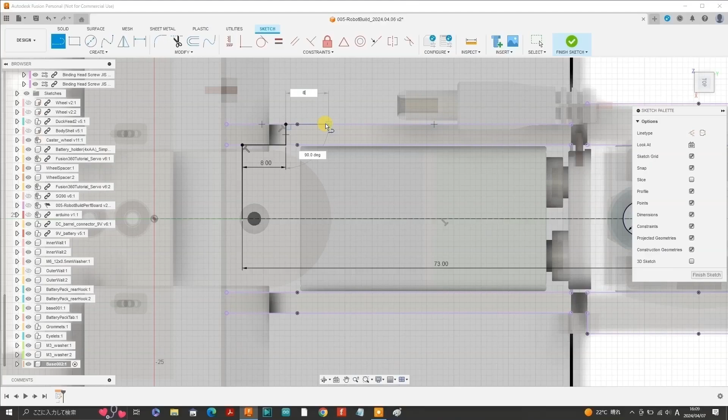In part 11, we made steady progress on the chassis design using Fusion 360. Today in part 12, among other components, we'll design a rotatable catch for defining the insertion stop position of the 9-volt battery. Let's start with a section analysis to check a few things.

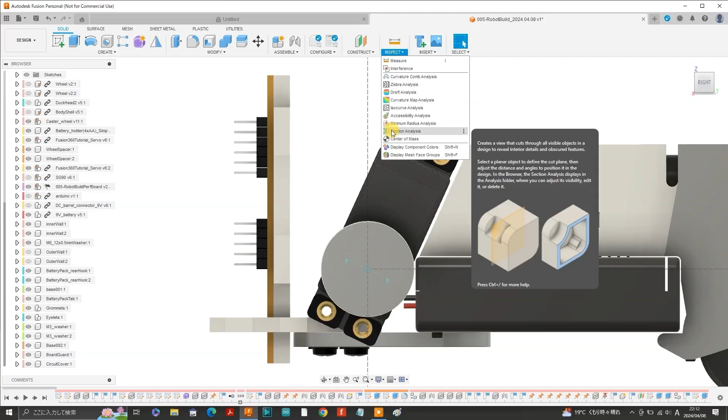Select section analysis from the inspect menu, swivel the design so that we can see the vertical lengthwise plane, and select that plane. We can see the two screws nicely screwed into base 1 via the battery tab, and the wiring on the rear side of the circuit board safely protected by the board guard and the circuit cover.

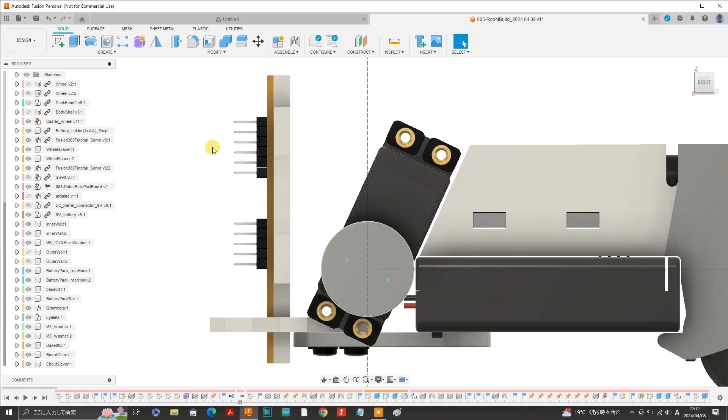Press OK to finish the section analysis and unhide each outer wall. Activate outer wall 1, select the outer face and select sketch. Press P to project and project the shape of the board guard protrusion onto the face of the outer wall, and also the corresponding protrusion of the 0.5mm thick circuit cover, and also project the lower protrusion in the same manner.

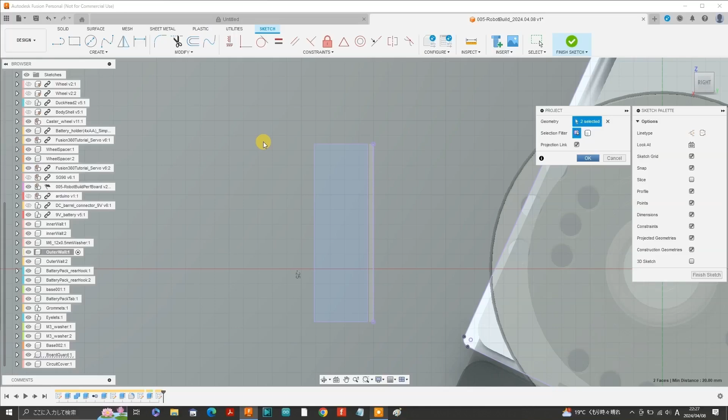Because the board guard and the circuit cover are separate components, I thought it would be best to sketch a rectangle to encompass both projected shapes of the protrusions of these components while utilizing the projected shapes for snap points. Next, use the offset tool, select the rectangle we just sketched and set an offset of -0.2mm.

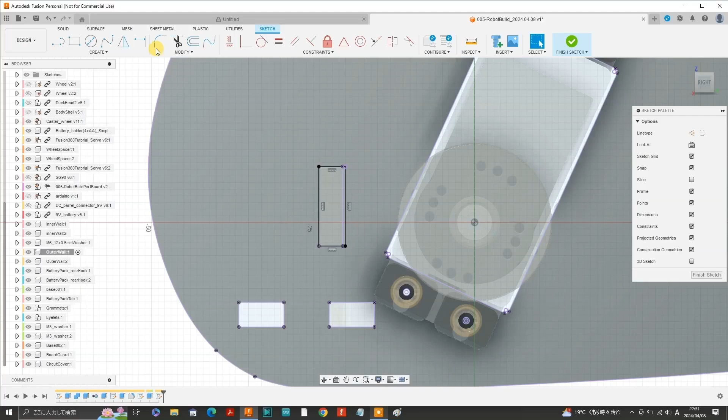Create a similar offset for the lower rectangle too. Now we want to extrude those rectangular shapes. Let's first hide the circuit cover and the board guard.

Now select the entire area within the rectangular shape and extrude by -3.7mm. Do the same for the lower rectangular shape.

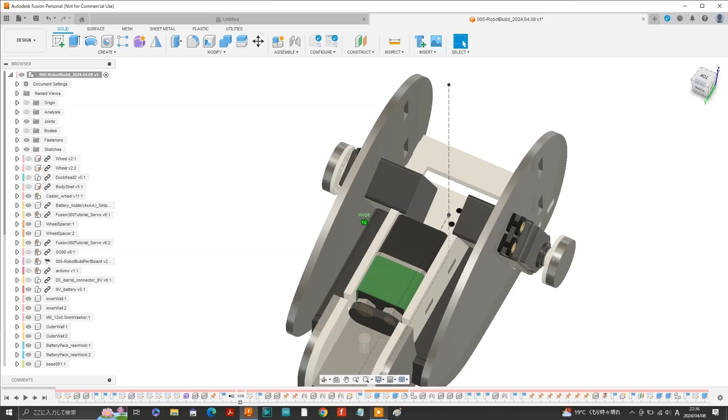Activate the main design, and as you can see, upon turning the design around to the other side, corresponding rectangular holes have been automatically formed on the other outer wall. Now we can unhide the circuit cover, the board guard, and the circuit board itself.

Next, we want to screw the circuit board to the board guard and circuit cover, so let's measure the thickness from the front face of the circuit board to the rear face of the circuit cover to determine the length of screw that we'll need, and it reads 5.8mm.

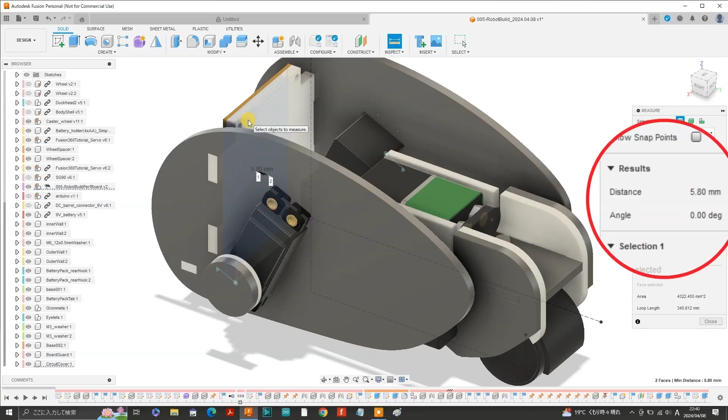Select metric M3, and I think a length of 8mm should be fine. Scroll down to the nylon screw, select the step format and download.

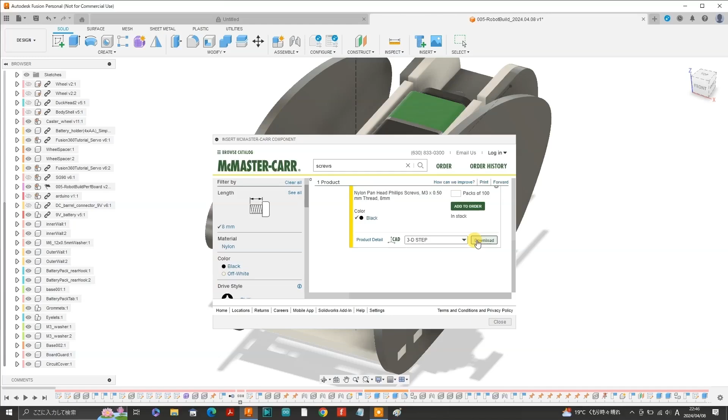Move the screw to the front, color it white, modify the component name for better readability, and make 3 copies of the screw so that we have 4 nylon screws.

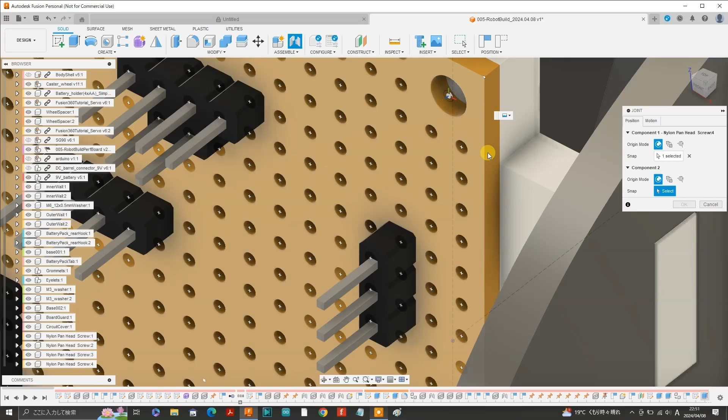Use the joint tool and select the underside of the screw head while pressing the control key. Select the center snap point and swivel the design back and select the center snap point of one of the mount holes. There we can see the nylon screw gliding into the mount hole.

Insert the remaining 3 nylon screws into the respective mount holes in the circuit board in the same manner. I labeled each joint screw to perf board.

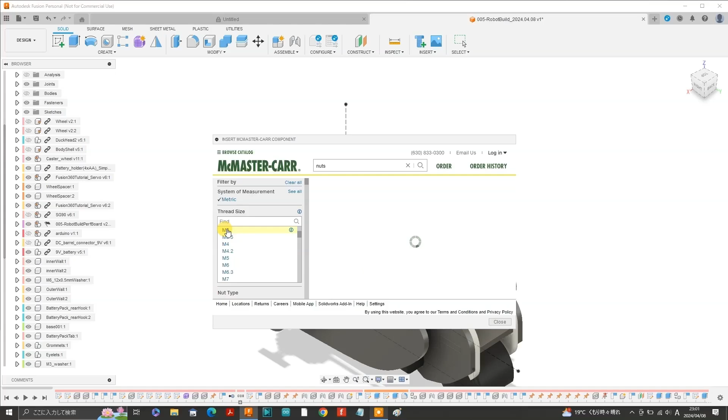Select an M3 nylon nut and download the step file. Move the nut to the front. I renamed the nut M3 nylon hex nut. Color the nut white, make 3 extra copies of the nut, and join each nut onto each corresponding screw end. I labeled each joint nut to circuit cover.

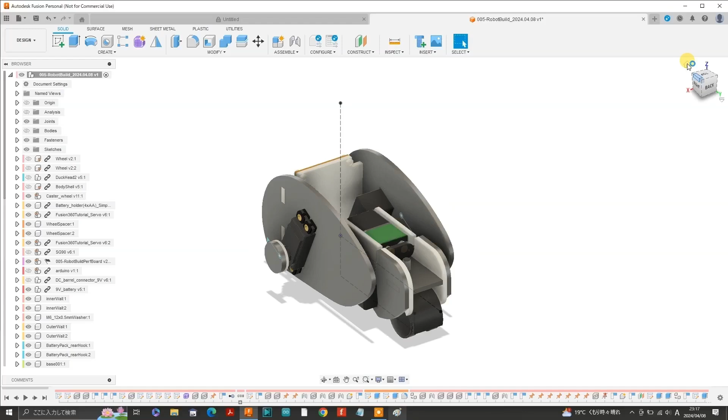Next, unhide outer wall 1 and also inner wall 1 and battery pack rear hook 1. At the moment we have an M6 washer through which the bolt of the caster wheel fits and onto which base 2 sits. So let's make a copy of that M6 washer and move it up a bit.

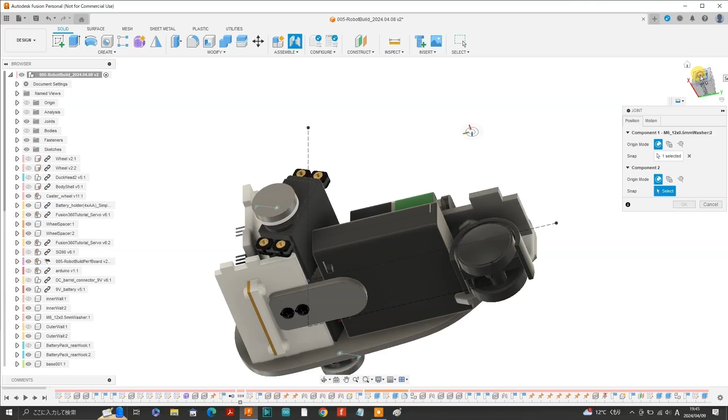From assemble, select joint, select the center snap point on the underside of the washer, then select the center snap point on the top of base 2 at the hole, and the washer glides into place. Label the joint M6 washer to base 2.

Now it's time to add an M6 nut. In my case, I already have an M6 nut design in my data panel. You can easily download an M6 nut from, for example, Insert McMaster Carr. So I'll insert the M6 nut into the design.

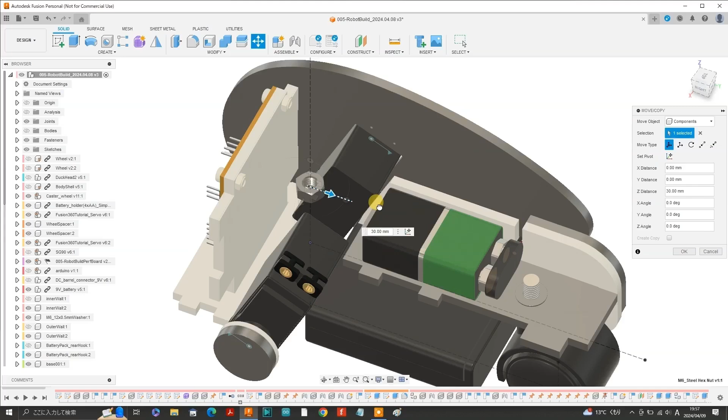Now use joint to assemble the nut onto the caster wheel bolt so that the nut sits onto the M6 washer. Before we carry on, we should label the new joint, M6 nut to M6 washer.

Next, we'll adjust the longitudinal position of the 9-volt battery using the move tool and move the battery back by 2.5 millimeters, which seems a good position relative to the M6 nut.

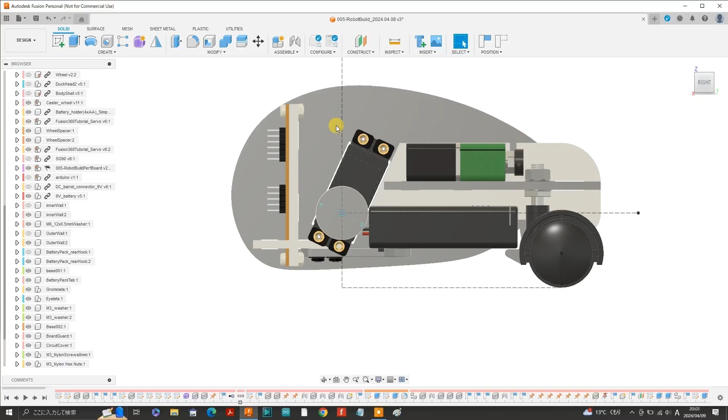Unhide inner wall 1, turn the design around to the other side and hide outer wall 2. Since we adjusted the longitudinal position of the 9-volt battery, the notch in the inner wall no longer aligns with the wires from the 9-volt battery snap connector, so we'll need to make a few adjustments.

Hide battery pack rear hook 2.

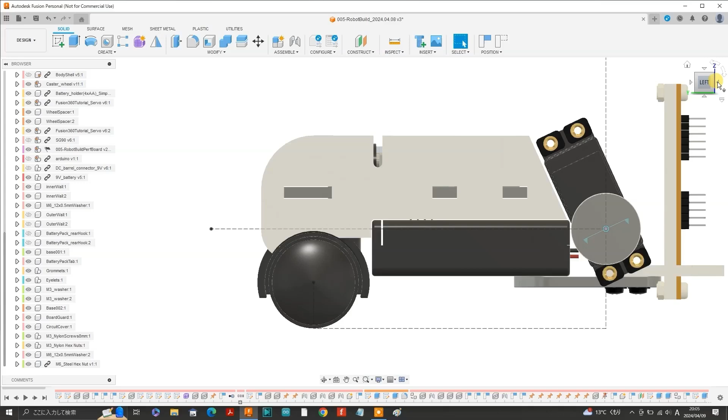The sketch for the notch in each inner wall is on inner wall 1, so let's rotate back to the left side. I eventually found the sketch that includes the notch in the main sketch folder, which means I mistakenly forgot to activate the inner wall when creating the sketch.

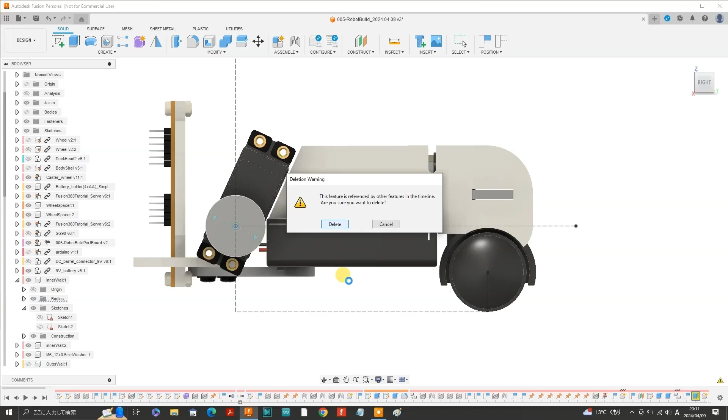So I'll just delete this sketch because it was dedicated to form only the notch. We should also delete the extrusion of the notch from the timeline. Now turn the design around and activate inner wall 2.

Select the outer face of the inner wall and create a new sketch. Select capture position, zoom in a bit, and press P to project. Then just select the face of the inner wall and hit OK.

So we'll first sketch an initial 18mm line from this projected point, then an initial 7mm vertical line, and change that 7mm line to a construction line.

Select circle, sketch a 3mm diameter circle, and we need to convert that circle to a solid circle rather than a construction circle. Draw a solid vertical line parallel to the vertical construction line at an arbitrary position but slightly longer. Select the tangent tool and make that line tangent to the circle.

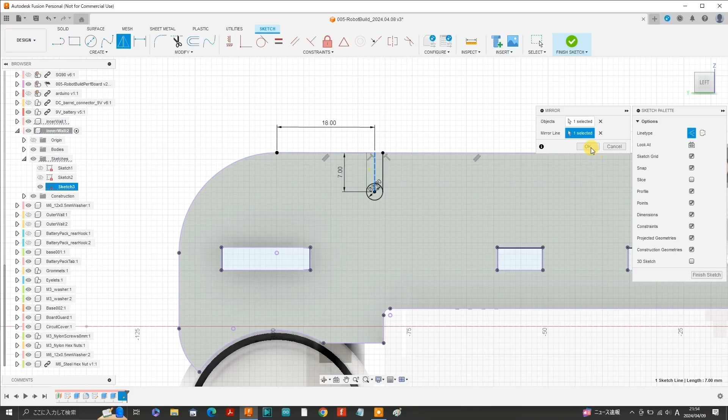Then make the endpoint of the line coincident with the tangent point using the coincident tool. Then simply mirror that line about the construction line using the mirror tool. Finish sketch and cut the notch by 3.7mm using the extrude tool.

So initially it doesn't look as though the notch is in the right position. I'll just activate the main design to have a decent look. So it looks as though the notch needs to move forward a little and also a little longer to accommodate the wires coming from the 9-volt snap connector.

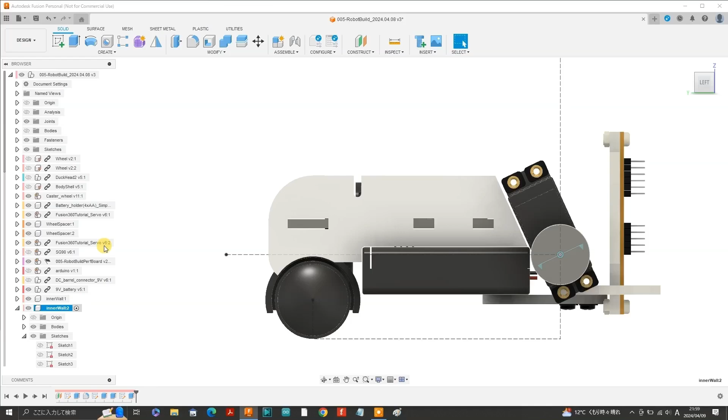Activate inner wall 2, edit the latest sketch, sketch 3, which actually activates inner wall 1 as inner wall 2 is a copy. Change the position of the notch from 18 to 19.5 millimeters and the vertical dimension from 7 millimeters to 10 millimeters. Finish sketch and also hide the sketch.

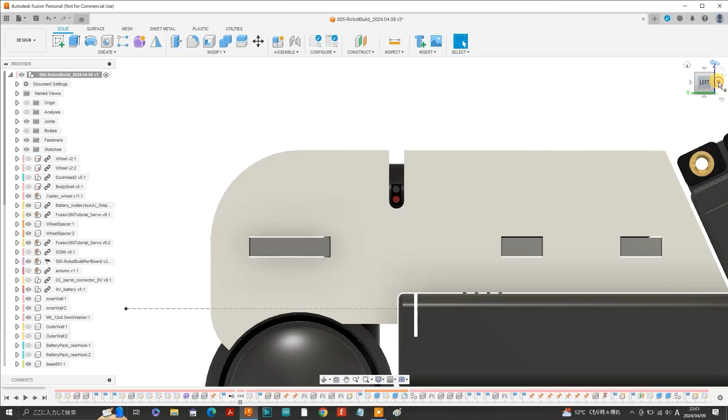Activate the main design again. There we can see that the wires from the snap connector can extend through the notch unhindered by the inner wall. However, once we unhide each battery pack rear hook, since we have deleted the old sketch of the notch,

which each battery pack rear hook relied on for part of their profile, it becomes apparent that we need to redo the front part of their design. So let's edit sketch 1 of the battery pack rear hook, which has become unconstrained.

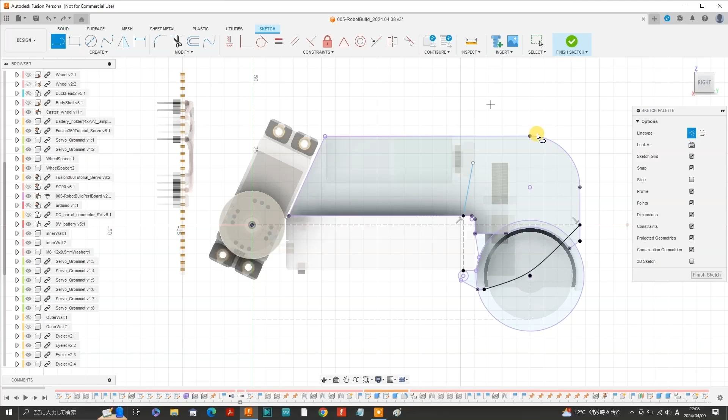Sketch out the dimension of 19.5 millimeters. Sketch a vertical line from that point to a length of 17 millimeters, and right-click on that angled unconstrained line and delete. Now from Create, select Conic Curve.

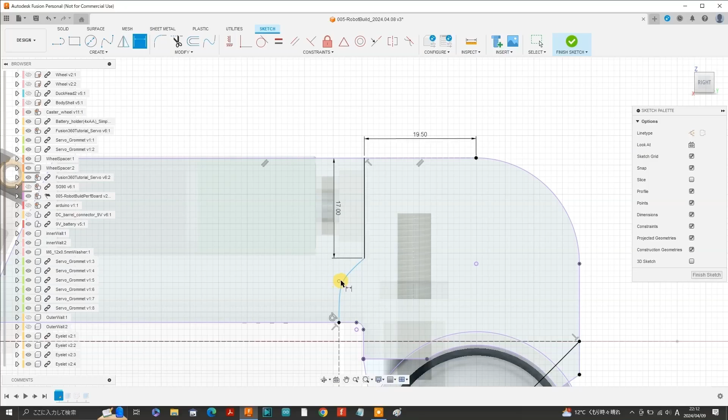Select a conic curve from the bottom of the 17 millimeter vertical line to the point where the deleted line commenced, and set the distance of the vertex point to 7.5 millimeters. Finish sketch, and use the extrude tool to cut the unwanted section.

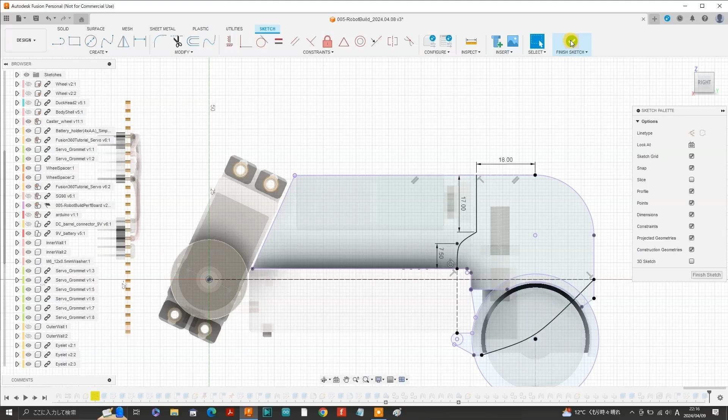There we can see we have used the wrong size dimension for the upper dimension, so let's fix that. Edit sketch 1 of battery pack rear hook and change the 20.5 millimeter dimension to 18 millimeters. Finish sketch. Now we can hide that sketch and we can visually confirm that the battery pack rear hooks no longer interfere with each respective notch.

While we're here, we can round the corners by 2 millimeters using the fillet tool, and likewise at each corner at the open end of each notch.

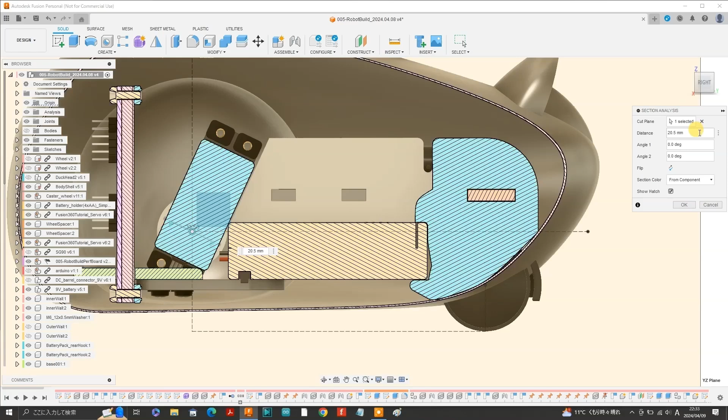Let's do a section analysis at 20.5 millimeters from the longitudinal plane to check whether the battery pack rear hook interferes with the body shell. And when we zoom in, we can see that the battery pack rear hook does interfere a little bit with the lower body shell.

Hide the body shell and edit the sketch of battery pack rear hook 1. I won't go into detail, but I'll just modify the lower profile to bring it safely away from the body shell and then finish sketch.

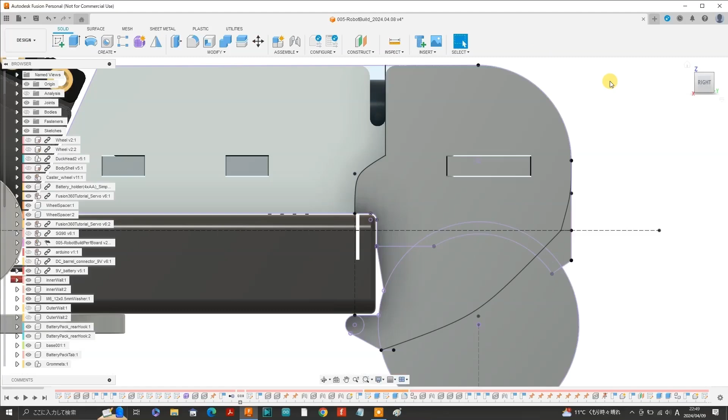So the profile of the battery pack rear hook has been redefined, so we'll use the extrude tool to cut off the excess material along our newly sketched line. Hide the sketch, do another section analysis, and we can see that the battery pack rear hook is clear from the body shell.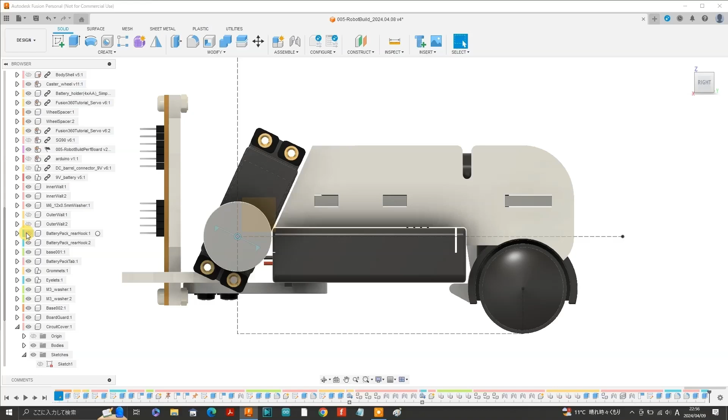Now we need to start thinking about joining the two inner walls together, so first hide battery pack rear hook 1 and activate inner wall 1. Select the outer face of the inner wall and create a sketch.

Press P to project and select the entire face to project the entire profile. Change the line type to construction. Sketch a 10mm vertical construction line from the rear top corner of the rectangular opening.

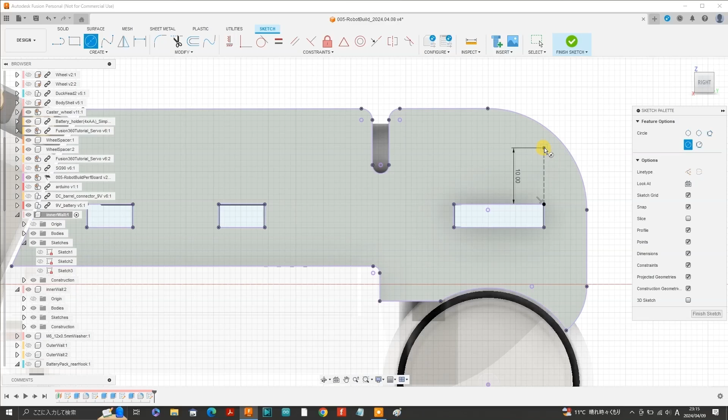Then sketch a 20mm diameter circle centered on the endpoint of that construction line and a small inner circle having a diameter of 3mm. Extrude the protruding circular section by 3.7mm and hit OK. Cut the 3mm hole by extruding by 3.7mm.

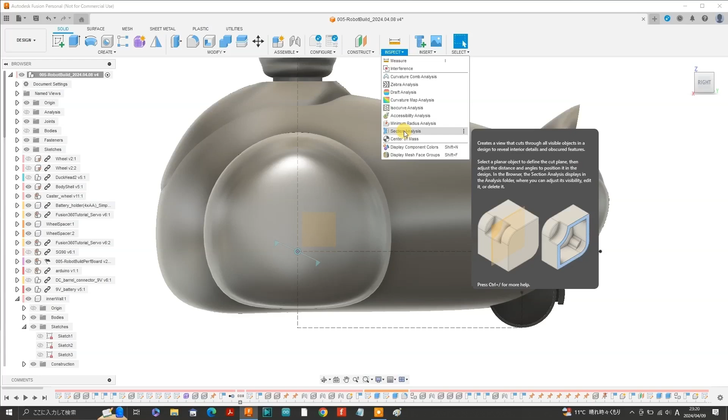Hide the sketch and activate the main design again. Unhide the body shell and do a section analysis at 16.8mm from the center, and we can see that the circular portion of the inner wall is not even close to the body shell.

Actually, we might edit the sketch and adjust the dimension of the circle from 20mm to 12mm and finish sketch again.

Hide the sketch and we can see that both inner walls have automatically adjusted to the new size of the circular shape. Unhide battery pack rear hook 1 and activate it.

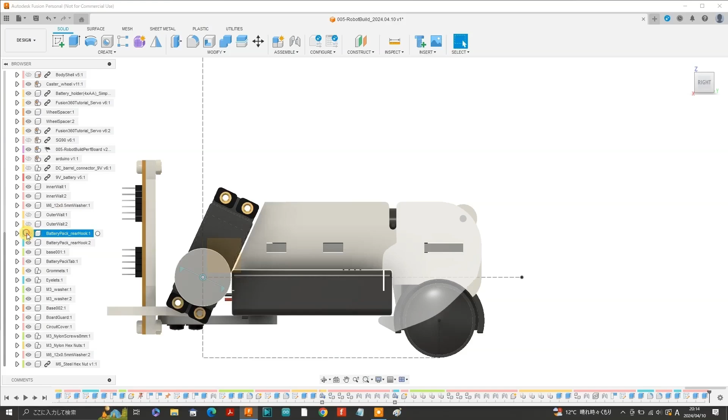Create a new sketch and select the outer face as a sketch plane. Press P to project, select the inner wall including the newly created circular shape, and hit OK. Then extrude the circular shape.

Extrude by -3.7mm, unhide the sketch, and form the hole by extruding by -3.7mm. Hide the sketch and activate the main design again.

Hide inner wall 1, switch to the top view, hide inner wall 2, and hide the 9V battery. Next, edit the sketch of base 2 and use the line tool to sketch a line across the base at the 8mm mark, then finish sketch.

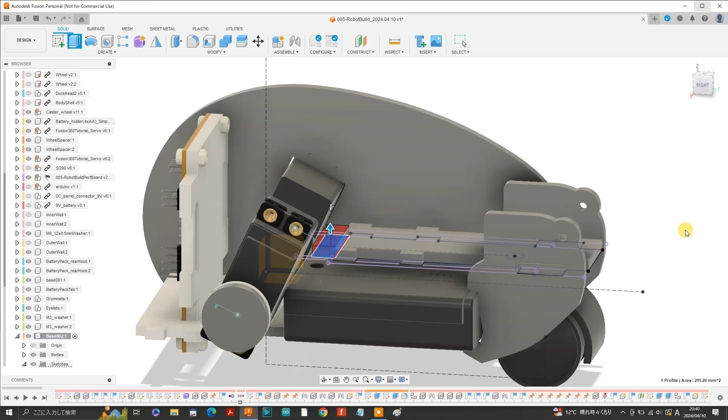Use the extrude tool to remove the 8mm section of the base, as I decided that I wouldn't need it anymore. Unhide inner wall 2, the 9V battery, and unhide inner wall 1.

Unhide sketch 4 of inner wall 1, then right click to edit this sketch. Select the circle we have just sketched and also the inner 3mm diameter circle. Right click to create a copy of the two concentric circles.

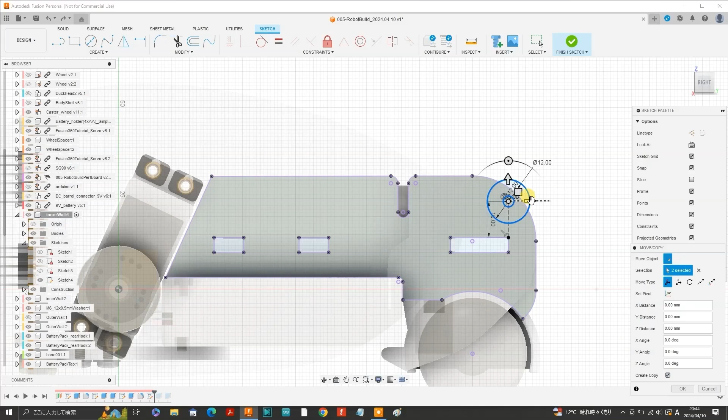You'll need to check Create Copy on the Move Copy palette to make a copy. Then move the copy of the circles to the left and down a bit and then hit OK.

Then select the tangent tool and make the outer circle tangent to both the angled front side and the lower side. The 3mm hole looked a little too close to the rectangular opening, so I tried adjusting the larger circle to 9mm, which moved the 3mm circle away too much, so I finally settled on a diameter of 11mm.

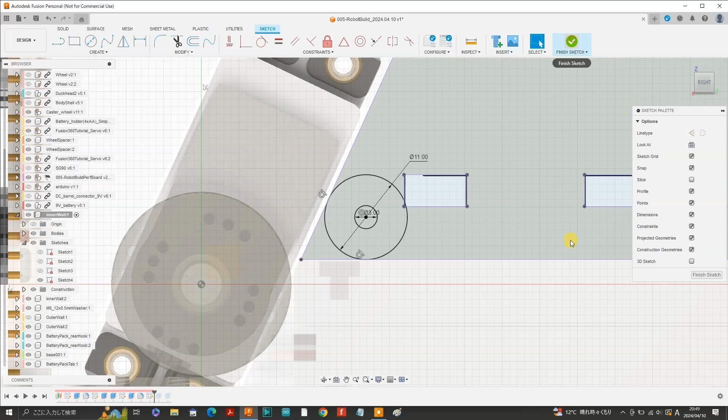Then finish sketch. Select and extrude the 3mm hole by 3.7mm. Let's unhide outer wall 1 and activate it.

Select the outer face and create a sketch. Press P to project and select the entire profile of the outer wall.

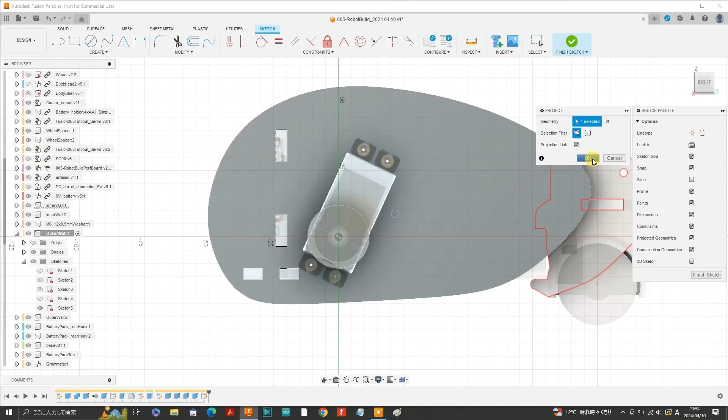Next, we need to initially hide the outer wall to select the 3mm hole on the inner wall, then promptly unhide the outer wall again, and there we can see the 3mm hole projected onto the outer wall. Finish sketch. Select the profile of the little hole and extrude.

Extrude by -3.7mm. Activate the main design, hide outer wall 1 and inner wall 1.

Create a new component and label it battery catch. We also need to hide the left servo in order to access the central vertical plane.

The plane is still quite hard to see, but it becomes more visible once you select it because it turns blue like this. Then create a new sketch on that plane.

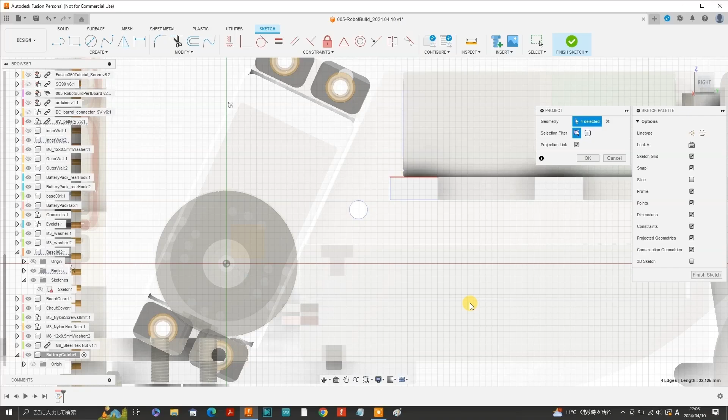Zoom into the area where we formed the 3mm hole and press P for project. Project the 3mm hole from the inner wall, the front underside portion of base 2, the front end of base 2, the rear end of the 9-volt battery, the top surface at the front of base 2, and the inclined edge of the inner wall.

Hit OK. Select the circle tool and sketch a 3.2mm diameter circle centered at the center of the projected 3mm hole. Then sketch a concentric circle with a diameter of 9.5mm.

This donut shape is the pivotal mount of the battery catch or stopper. Then build upon this shape around the upper and lower sides of the front end of base 2, and against the rear side of the 9-volt battery in this manner, while utilizing the tangent tool.

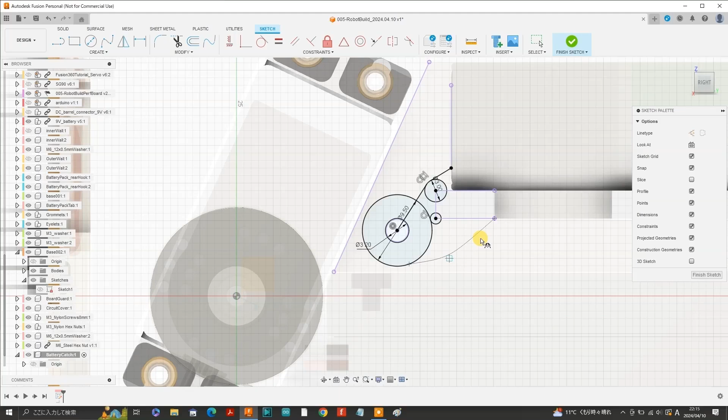As you can see, I have utilized the conic curve tool to design the lower latch part of the battery catch, and I also used the dimension tool to constrain the vertex point of the conic curve.

I sketched a 5mm circle for the stopper portion that comes into contact with the rear end of the 9-volt battery. Use the tangent tool to constrain and properly position the stopper portion.

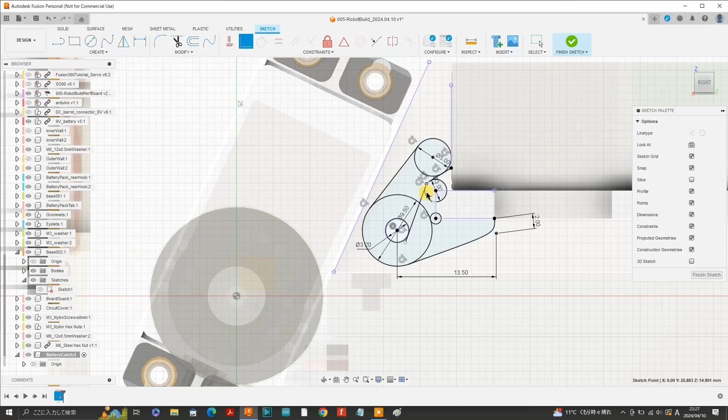Sketch a random line and use the tangent tool and the coincident tool to complete the design of the battery catch. I'll just redo this line so that it is tangent to the 3.2mm hole instead of the center of the hole. Finish sketch.

Select the extrude tool, select the profile portions of the battery catch, select symmetric for direction, and extrude by 3.7mm divided by 2 because we're extruding in both directions.

Activate the main design again, and there we have the battery catch component formed. Unhide inner wall 1, outer wall 1, and the left servo.

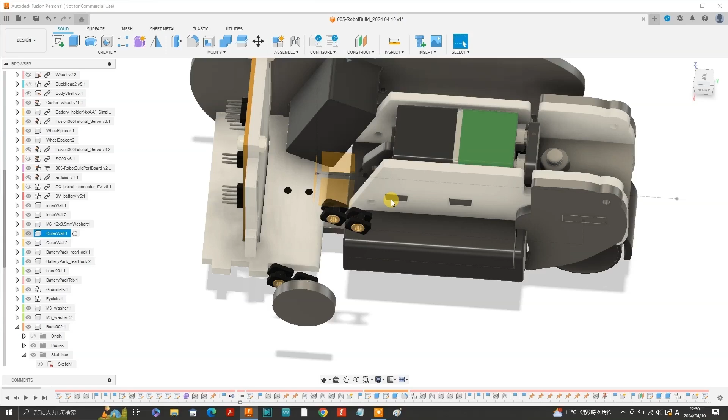Now we want some M3 washers, so select one of the M3 washers on the browser, which is one of the washers on the battery pack tab.

However, on further inspection, I discovered that I had inadvertently extruded part of the hole of the battery pack tab when I created the washer. So I fixed that by editing the extrusion operation in the timeline. So there it is, fixed.

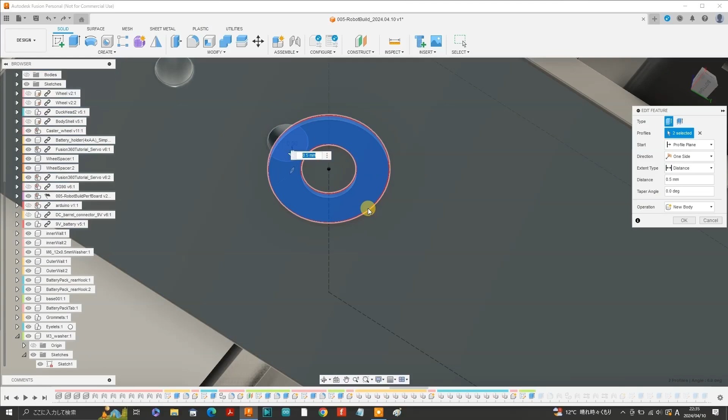Anyway, select one of the M3 washers on the browser, select the Move Copy tool, and create a copy of the M3 washer. Using the joint tool, I attached the washer onto the outer wall around the newly formed hole.

I labeled the joint M3 washer to outer wall. Check the description below regarding the M3 washers I actually used in the implementation stage.